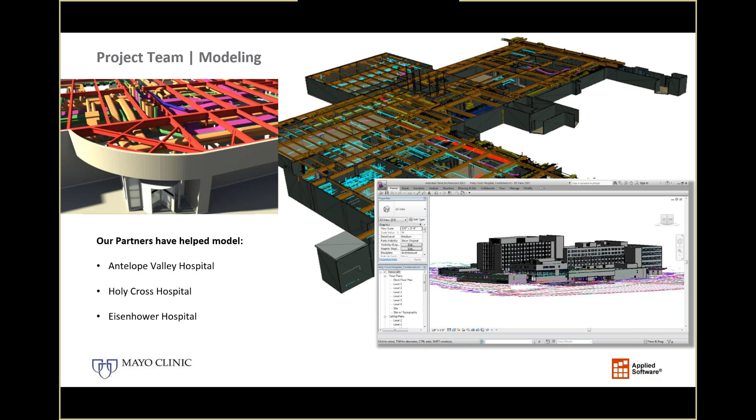Another nice thing about Coast to Coast is that they have representatives or staff spread out throughout the country, so they can service all of your locations, and they do that very well. We have other examples of work we've done with them as a subcontractor to us.

In addition to modeling services, they also provide scanning services, and have done medical scanning of some pretty sophisticated and complex healthcare facilities using 3D laser scanning equipment. They also use more commonplace linear laser scanning measuring devices when a full 3D laser scan isn't needed. So they're well versed in all different levels and needs for scanning and modeling services.

So we have a pretty good bench there and good experience with these partners. In addition, as I mentioned earlier, we have an extensive partner network for training capabilities in applications or solutions we're not experts in—but we are experts in BIM implementation, BIM software, and construction technologies and fabrication, which all surround what we think are your core needs.

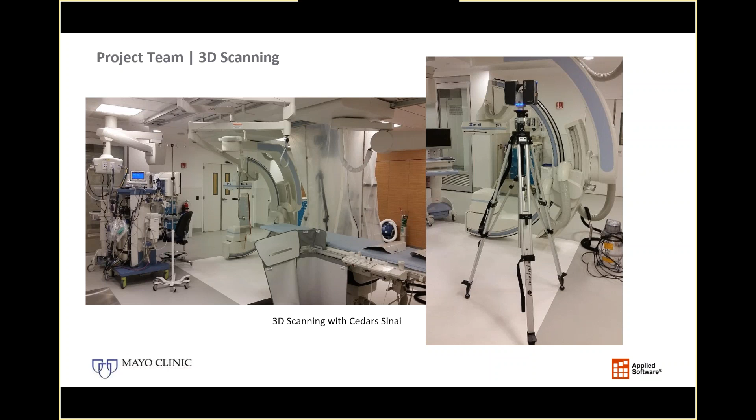So now we just wanted to recap the overview of the four phases you outlined in your RFQ, and make some comments on it to begin with. If you could go ahead and list all four phases, that would be helpful.

In reviewing the schedule as you presented it to us, we feel it's pretty aggressive for the first phase. We're also confident we can meet those needs—developing the BIM protocols, the content and guidelines, and even providing training for your staff. We can do that, but we also see a need to collect some information in order to know exactly what those creation guides and BIM requirements need to be.

It can be an evolutionary process, so we don't need to stagnate getting to modeling existing facilities, but at the same time we want to make sure we're collecting and modeling the information you need, incorporating it into any training program and models we build for you. Although that wasn't highlighted as a step under phase 1, we would propose doing even a short discovery as soon as possible.

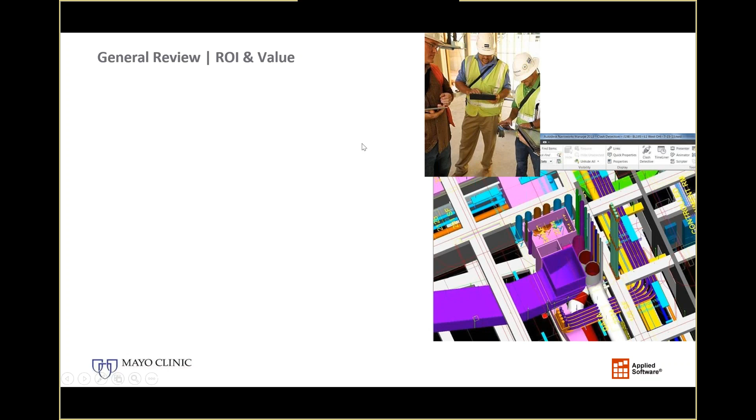So one of the questions you had was regarding return on investment and the value that implementing a BIM process would have for you. I think you already sense it's going to do that. The nature of building information modeling is that it adds richer data to help make better decisions and support operations, maintenance, and other facilities management activities. It's a way of centralizing data, making it more contextual to the overall building instead of having federated information that doesn't stay updated.

We think part of a discovery process, whether it's that initial discovery or while working with you on the initial buildings and training, is to define the key performance indicators you want to track, so those can be incorporated into any BIM requirements and so we can actually measure your own return on investment.

We've had clients reply back to us after a few years of implementing BIM workflows and Revit as their primary authoring tool. I actually had an unsolicited conversation with a client on Monday. They've been so happy with their migration to BIM and Revit, comparing it to past projects of a similar nature, that they saw a performance gain of 40%—though I want to qualify that this is very unusual.

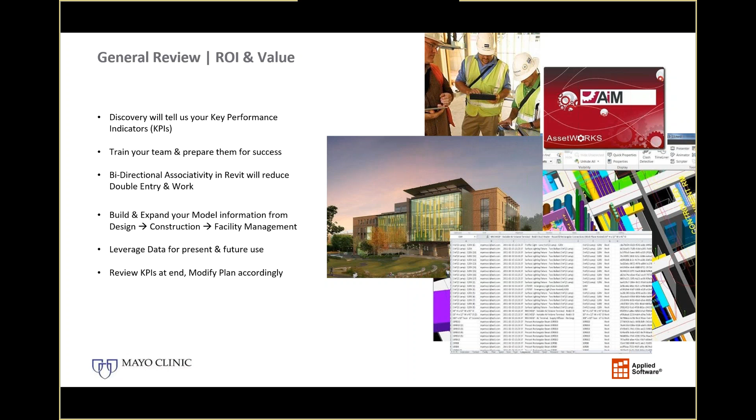Thanks, John. As John mentioned, my name is Michael Zeveld, and I'm the Senior Project Manager with Applied Software. I actually have a personal connection with the Mayo Clinic. I grew up in Minnesota and worked in architecture up there for years, did several projects with some of the hospitals, including the Children's Hospital in St. Paul, which is a clover leaf-shaped hospital. Growing up in Hastings, about an hour up the road from Rochester, I spent some time in that area.

But really, the personal connection piece is, I have a niece who lives up there, and at the time was 11 years old, and she was diagnosed with a brain tumor, and is now cancer free and got through it. The technology that helped to cure her was developed through the Mayo Clinic.

So that's a personal tie-in for me, and very exciting, because in the end, all this stuff we're trying to accomplish with these buildings helps people do research or do better at their work and help find these cures for the end result patient. Tracking this information and making these models is just making that environment better for those people. That's what we're really doing this for, the people who are going to be the end recipients of the results in these buildings.

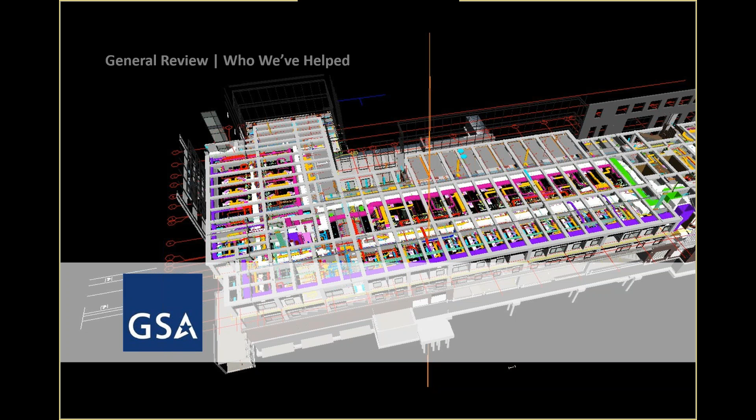Another one we wanted to look at was Chick-fil-A, which is quick serve type restaurants. For them, we initiated a big picture vision planning, a 3 to 5 year plan, which really looked at their business processes, how they approached building their restaurants. They also had their initiative to add 1,600 new stores throughout the next couple of years.

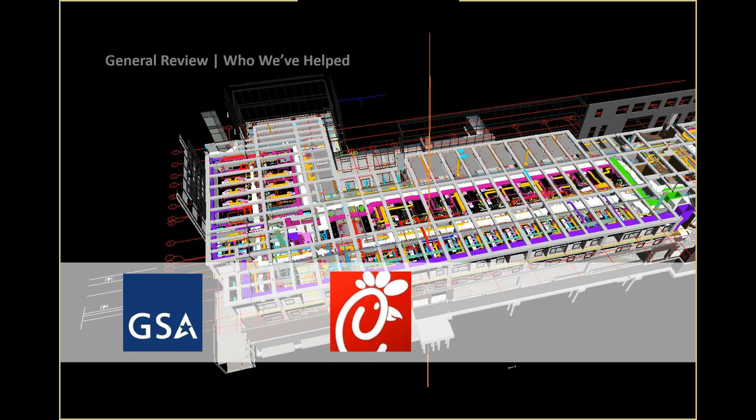So having that model access information when they're building new construction was key, but also when they do renovations and refresh, as they call it, they have a 3, 5, and 7 year cycle where they change out different things in the building. They wanted to track that information, how many pieces of equipment and what were the serial numbers and data contained, and then be able to take this information out to the field with mobile technologies. Their overall goal was to get into their buildings faster, more efficiently, and quicker - something like from 17 weeks down to 15 weeks, so they could do more business and be up and running. That was a great story. We trained their folks, did models for them, worked with their extended team, and introduced this technology.

The third one I wanted to highlight is Georgia Tech here in Atlanta. Their initiative was to integrate technology into their buildings, for new construction and also renovations.

We started out planning the overall process, which entailed a BIM execution plan and developing guidelines for not only the university to use, but for construction and architecture groups to watch over. We were also hired as an owner representative to track progress during construction to make sure

these technologies were being put into the digital models, which would then be handed over to the facilities maintenance folks. Their big thing was, it takes maybe a year or two to build these buildings, but they maintain them for 50 years after that, so the information contained in them is super important to them.

So it wasn't just creating 3D digital models, it was really looking at how we can have valuable information in there. That extended to the design teams, the architects, the engineers, training them to make sure they were putting the right information into the models.

So we were actually able to hand over this data-rich information to Georgia Tech, and downstream to their FM systems where they query and do work orders and different stuff like that.

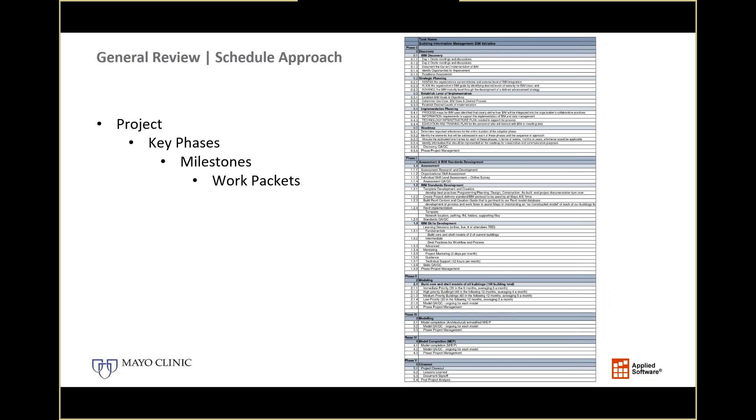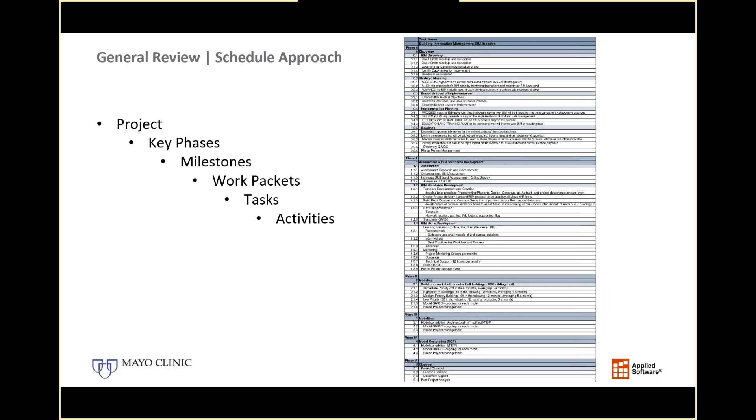What are the needs? I apologize, that's sort of small, but this isn't just a generic kind of schedule. We went through the actual exercise of really breaking it down to specific phases, what's involved, getting down into this work packets and work activities level for the actual task, to say these are the critical things we need to do, these are the components, these are the questions we need to get answered to move on to these other pieces. So just looking at how we approach this and the timing of stuff, we wanted to dig into that and address this so we can be successful moving forward.

One of y'all's questions dealt with the owner, you as the owner. What are our responsibilities, and what kind of resources do we need to support this whole BIM model and keep it updated and current? What technologies are in place? Are the computers adequate? Do you have the right software? We want to make sure those components are in place so you can be effective to maintain that.

A lot of this also comes down to top-down support, that the folks who are maintaining this or needing this information are in support of it, to have the folks get trained and be able to keep these models up to date and current. So that's something we want to address to make sure we're coming at this from the right angle.

I mentioned the end recipients, but also the people who will be working on this specifically, and how they address or look at this information. We want to look at, from a front end standpoint, where are people at? Do they know the specific software? Do we need to get them up to speed on training? The information Mayo Clinic wants to get out of the data is critical, and we need to make sure those pieces are in place.

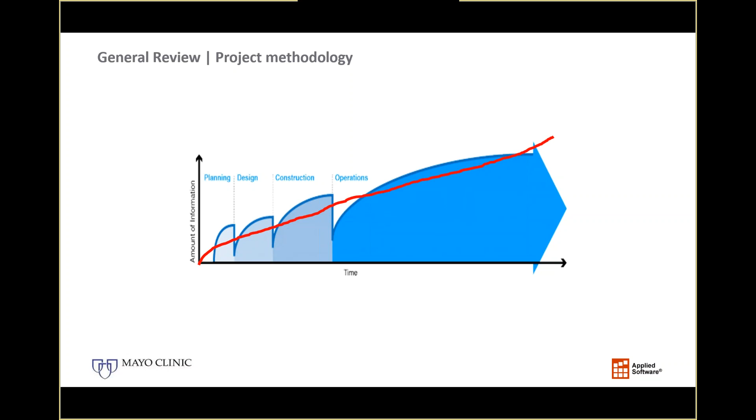So what I want to describe here is, all the information that we collect during each of the phases, we don't lose that information. It needs to get handed off or transferred over to the next phase.

In this example, once we get to construction, we can use things like QR codes or barcodes. You see a barcode, which we have linked to equipment and spaces and any object, if you will, so that during the construction phase, I can scan a barcode and all the information related to that particular object is available to me right then and there.

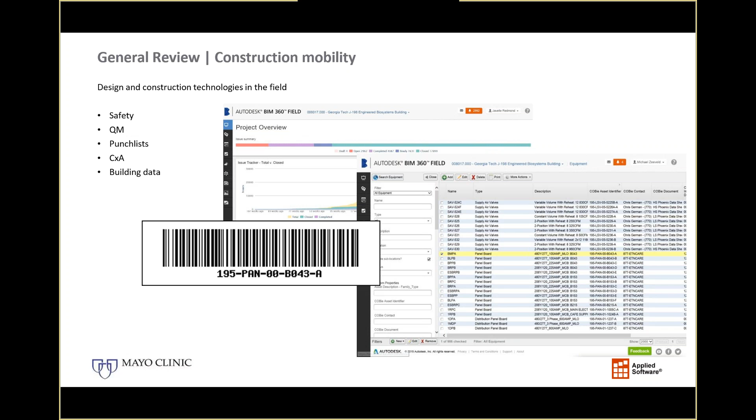The intent here is that we're constantly updating information through construction, so that during commissioning and handover, we're able to transfer that information. Everything I'm showing you here applies for new construction, existing construction, and renovation. So it's very easy for us to transfer data.

Let's go on to the next slide. This video, I want to show this video here, and let me kind of set this up to show you the idea of collecting information and then transferring it down the line of the project.

In this particular video, what I'm going to show you is this young lady. She moves into a new apartment building. This could be a renovation project, but during the design phase, maybe some equipment was spec'd out, but during construction it could have been switched. And then during handover, instead of handing over reams of drawings and notebooks of information that just kind of gets stored in a room...

All that information is collected in the cloud, and then we can simply, with literally a push of a button, transfer that information over a particular service, which you're going to see here by Autodesk, called Building Ops. But the same would apply for most FM packages.

So let's go ahead and start this video, and I'll kind of describe the workflow here. In this scenario, this young lady moves into her apartment, and the exhaust fan does not work.

So she can open up an app on her iPhone. This could be a tenant or a maintenance person. When they discover a problem, they could immediately fill out a ticket. That ticket gets created and it's pushed up to the cloud, and then the necessary people are notified.

So this gentleman receives this ticket and will head over to her apartment to take a look at it. You'll see that he removes the cover and there's a barcode for this piece of equipment. So scanning that barcode now will provide him all the information that was collected through design and through construction.

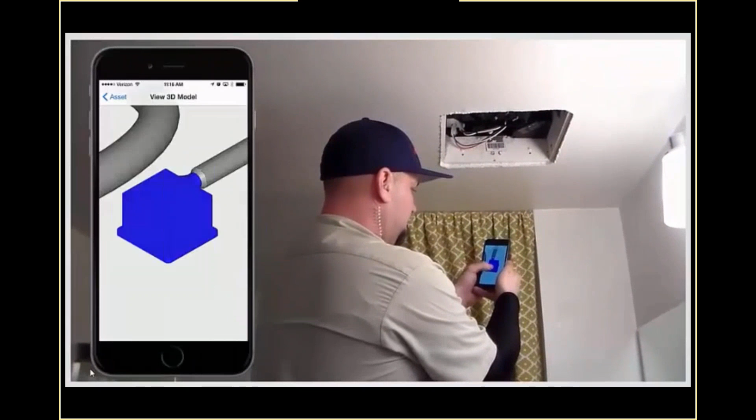He could even bring up the model to see how this equipment is connected to the system. He could bring up information about that particular equipment. If he wants, he can bring up a manual to see maybe there's some repairs he can make on the spot. But right there, it's available to him.

In this case, on a phone, it could be an iPad or a tablet PC. He can look at additional information or maybe who the installer was, and simply with his smartphone, click on a phone number, make a call, and address the equipment as far as needing it to get repaired.

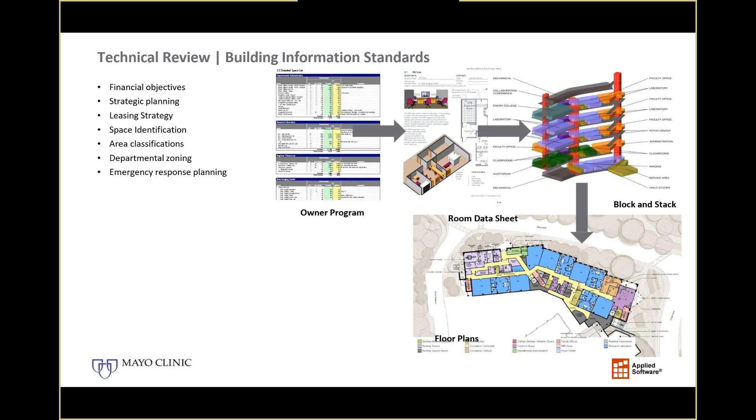Also, developing a BIM execution plan is critical as well. So as you're working with your consultants or architects who may be helping you out with buildings, making sure they have a clear understanding of what their expectations are. We want to help you define that and make sure it does include the information you're going to need to operate your buildings afterwards.

We've done this, like Michael Zeveld said at the beginning, with lots of different companies to help them establish this. It's a partnership with you to help you develop this together so that we include the information you need, throughout the entire process.

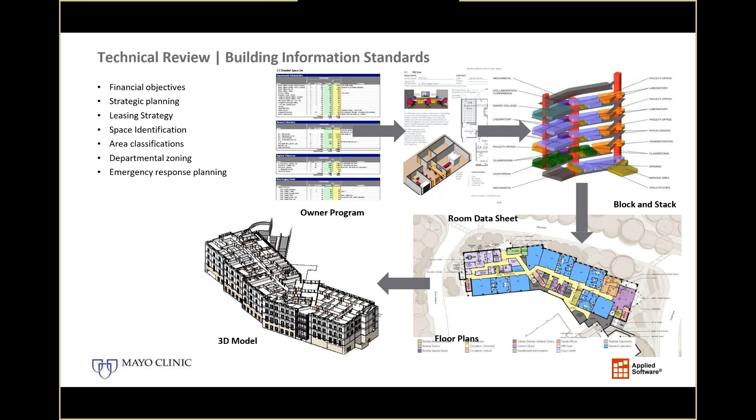All right, let's go to the next slide.

As far as information in the model, I think it's critical to know what information we need. So as we start developing content, whether it's a family of a piece of medical equipment or whatever it is, if we want to implement something like COBie standards, if we can input that information into the content initially, it's going to be there for us to use downstream.

So pinpointing that information that we need to pull out later on, and then we can extract it out in other programs, with mobile devices or whatever we want to do, to get that information in our hands later on in the process.

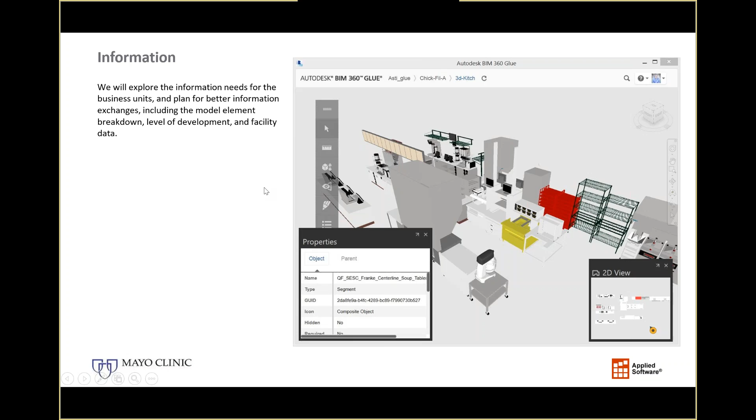I think one of the other concerns or questions you brought up was how to address working on multiple projects, or multiple projects happening on the same floor or the same facility at the same time. The good thing is that many of us have expertise and experience working with clients on projects where we've had that same demand.

So we have addressed that in the past, and I'm actually going to use kind of not a parallel industry, but a parallel process as a way of explaining it and how we would structure some of this.

A couple of examples I can bring to bear on my own, and I know that Mark Petrucci, Michael Zeveld, Matt Dillon, Mike Massey, and all of us on our technical team have different experiences that speak to this.

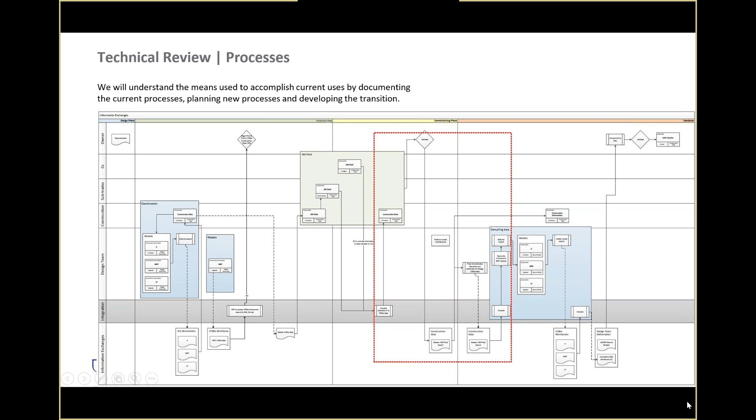And training would extend not only to your own staff, but we also see a need to potentially train your ecosystem, those who are working with you on your projects to provide or update BIM data on new projects. So we can go to the next slide.

So equally important, and Mike kind of touched on this already, and it ties into the standards, is this workflow of maturation. We've already talked about the standards to define how we want people to provide information and how to create it and why. It's helpful to make sure that people know why they're doing something, that way they understand the importance of following a guideline. It's not just there to make their lives difficult, it's there to ultimately make their lives easier.

So in this case, it's about what data gets input. We would collect that early on in the discovery workshop, in the process of learning your workflows and making sure that we capture and identify the specific pieces of data, where they go, and who is the authoritative body for it. Some of that's going to come from the designer. Some of that's going to come from you operating the facility. Some of that may come from your operations and maintenance group. Some of that may even come from a manufacturer or subcontractor during construction or installation.

So there are different sources. You want to make sure that those people are putting in the information and that they know that they're the source for it. So we have worked specifically in a Georgia Tech workflow using COBie as a collection system for taking data that has been collected either in the field and or in the design models, outputting it to a more generally accepted industry standard format like COBie, if needed, and then transporting that into an O&M system.

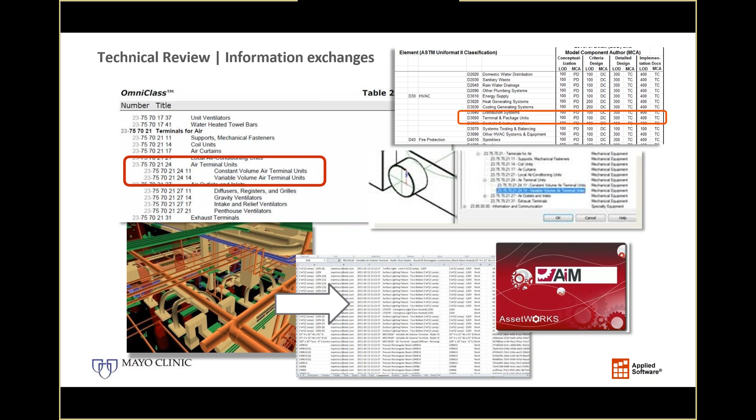In this case, we have an example where we've done it with AIM. We've also done it with Archibus. So we've worked with different FM systems. We do believe that the Four Rivers TMS has similar capabilities, so we're pretty sure we can integrate with it.

We have a team of developers that not only develop tools for Revit, but they also develop and solve the integrations between different databases.

So part of the standards is also defining responsibility. So this slide is really just showing a tool that we would use as part of the process to say, all right, we talked about who is modeling what, and this usually comes up as part of that BIM execution plan that we've already mentioned. It is one of those standards, one of those guidelines that we would want to put in place with you to help identify who is the responsible party and who is ultimately going to be the one filling in the data.

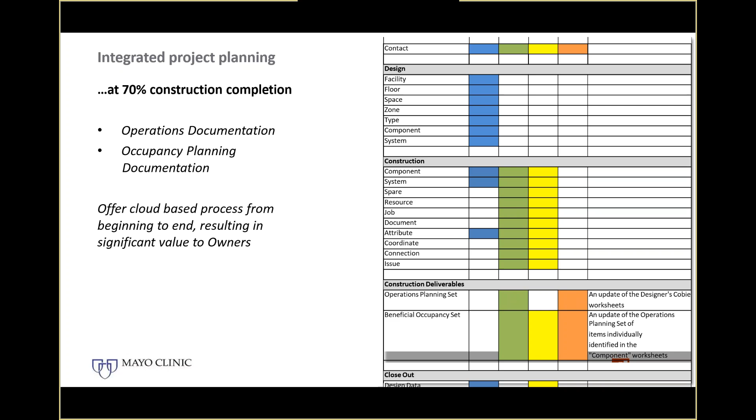So Mike is going to take over again and talk a little bit about some infrastructure needs. Sure.

As far as infrastructure and hardware requirements, let me start by saying this: for years, every time a new release of a CAD product came out, we'd have to upgrade our hardware to meet new standards. I think the technology has finally caught up with the software. We don't have to worry about hard drive space anymore because our drives are so big. The technology is there now, where the software isn't driving the technology anymore—the technology can handle the software.

But we will ensure that your hardware and technology are up to speed and meet the current standards required for these programs. These are big models, big files we're talking about, so we want to make sure we have the correct hardware so we're not sitting there waiting all day for processing. We'll do some discovery to see what you currently have and make any recommendations needed to ensure you can work efficiently.

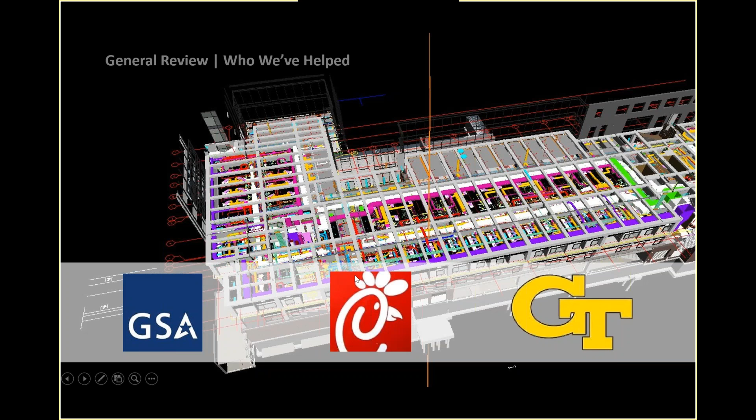At the beginning of your presentation, you showed a slide with the multiple firms and companies you've done business with. My question is, which of those firms, or how many, were at the same stage Mayo is at right now? You mentioned Georgia Tech and a couple others—are they the same size and complexity as what you're seeing here in Rochester, Florida, and Arizona? That's my question in a nutshell. I want to make sure that you've actually done it, not just shown us the process.

Sure, I think it'll probably be a bit of a tag team answering that. One of the projects that comes close in terms of complexity, though not healthcare specific, is Georgia Tech—it's a campus-based solution.

That was a bit more of a step-based process, since as a state institution they have different processes and funding to go through to spread out the investment. We worked with them to supplement their 'yellow book'—their overall production and documentation guidelines that all subcontractors must abide by—with a BIM requirements section, which has since been pulled out as its own separate document. That was married up with training for their staff, and published so that future capital projects, over $3 million I believe, would use it. They weren't applying it to renovation and retrofit work to begin with; they wanted to start with capital projects where they had more budget and fee to implement it without hardship on their constituents.

Great, I'll wrap up. Thank you all for your time and preparation, and for being here locally—certainly appreciate that effort. After our meeting tomorrow, we'll at least give you an update on timeline. If we're ready to make a decision, we'll let you know, or if we need a week because we need a week, we'll let you know that as well.

All right, hey guys, well, tell Brian to copy the presentation we just did, so he has it for his reference. Sure, we don't charge too much for that. Okay, good—there was a laugh after that. I was hoping for that. Yeah, we can do that. Yeah, you can tell.